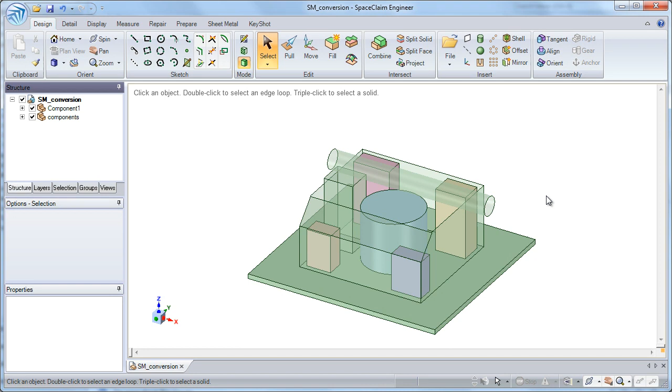Welcome to this sheet metal training module where today we'll look at how to convert a solid body into a sheet metal body. What you're looking at are a number of components on a board surrounded by surfaces. All the surfaces represent keep-out areas where the sheet metal body has to be smaller than those.

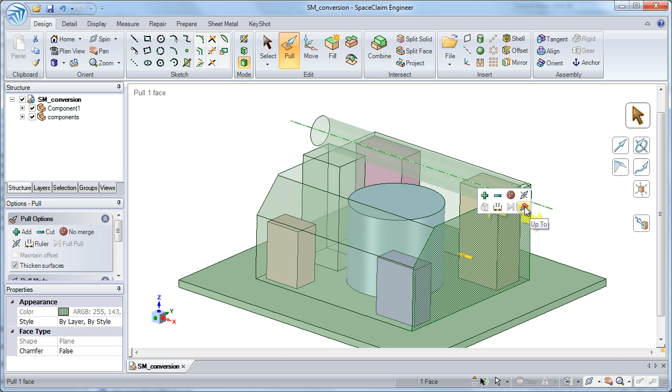So what I'll first do is use one of the surfaces that represents the extents and pull on it to create a solid body, and this will be the basis for my sheet metal structure. Now I want to pull on the top of it to make it a little bit bigger. The only requirement is that it sits below that cylindrical surface.

And I want to get rid of this small surface here, so I could either click Fill right now or pull on it until it's completely gone.

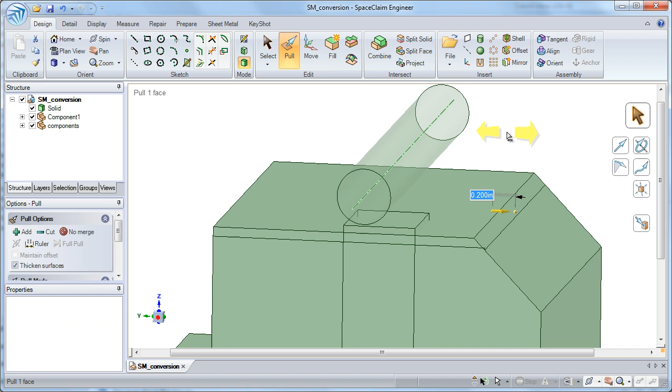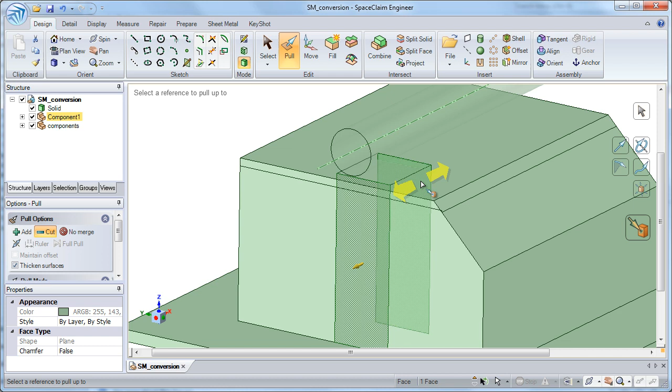Last thing I need to do is make sure I have no material where this rectangular cutout is. So again, using the surface that represents the keep out zone, I can force the pull tool to make a cut and force it to go up to the back surface. Now I can't see that, so I'll query-select by rolling up on the mouse wheel until that surface is present and selectable. Then I click on it and I've removed material away.

Now it's time to turn this body into sheet metal. How that's done is we first need to shell this out into a thin body material. I click the bottom surface and say shell. At this point you can type in any value you want. I'm going to type in 39 thousandths, that's roughly 1 millimeter, and then click the green checkbox.

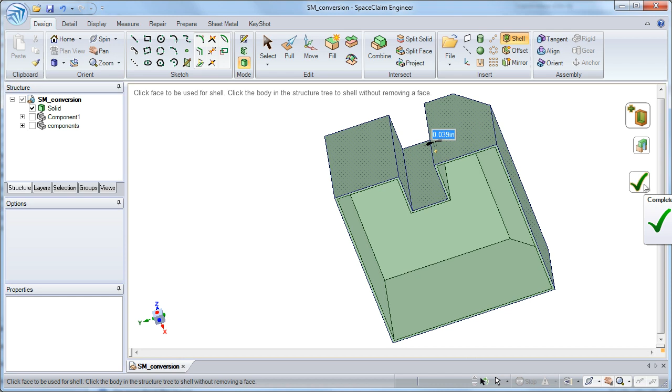And so this is going to be our sheet metal body, and we need to convert it to sheet metal. So I go to the sheet metal tab and say convert, and click on the solid body.

Every candidate for a bend and rip shows up in red. Right now my junction type is set to a bend, so any location I select, any red junction, turns into a bend. And so I could keep clicking all the way through.

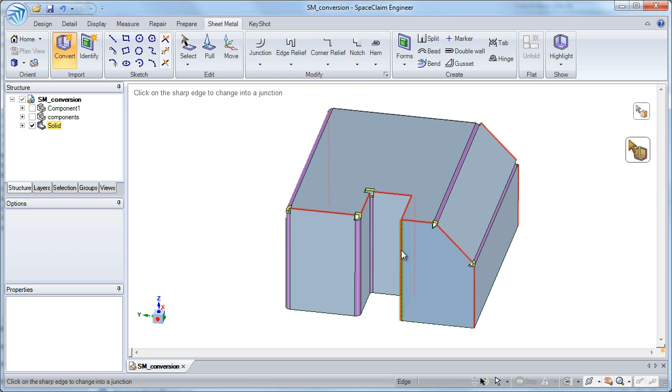And I think maybe I want a couple more bends on here, but I mostly want rips elsewhere. So instead of changing the junction type to no overlap and selecting the rest of these, you can do them all at once.

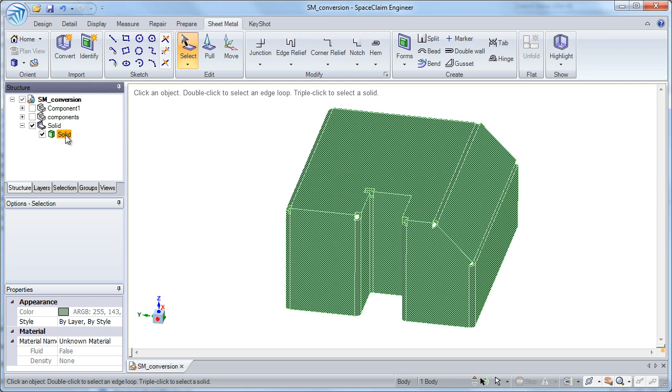Click the select button to get out of that mode. Triple click on the solid, which does the same thing as selecting the solid from the structure tree. With that selected, you want to go to the selection tool, or selection tab, and grab every hard sheet metal edge. And you see down below I've got 10 of those now selected.

With those selected, I could designate the junction to be a no overlap. And now those all turn into ripped corners.

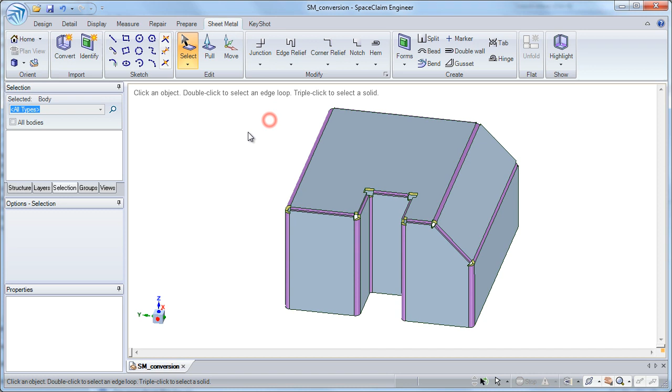So going back to the structure tree, I see that I've got one solid body, so it looks like I've got everything on one body, and when it unfolds, hopefully it unfolds correctly. So to unfold this, I'll select any planar face and click the unfold button. And there's the envelope dimensions of the unfolded body.

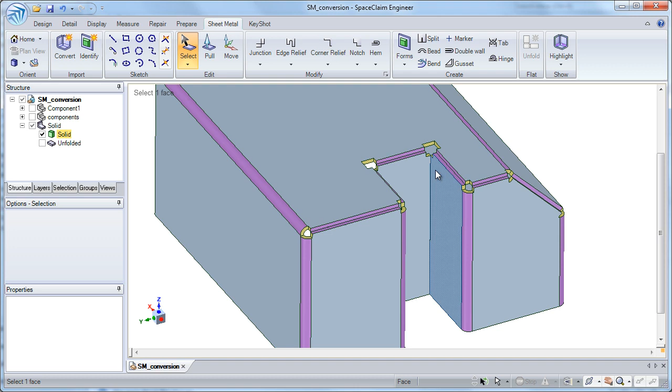Now, if I wanted to try out different unfold scenarios, meaning I could take any of these junctions and convert them from a rip to a bend and vice versa. So in the select tool, I'll go grab a junction, just select it, and turn this into a no overlapped or rip junction. Now when I do that, you see I've got two solid bodies in the structure tree.

This one has no bends associated to it. So I could take maybe that junction, turn that into a bend if I wanted to. Now I'm back to one solid body because it's all joined together.

And let's see what this looks like in the unfolded state. I'll click a planar surface and say unfold. Now you see that I've got in bright red a big overlap between those two flanges.

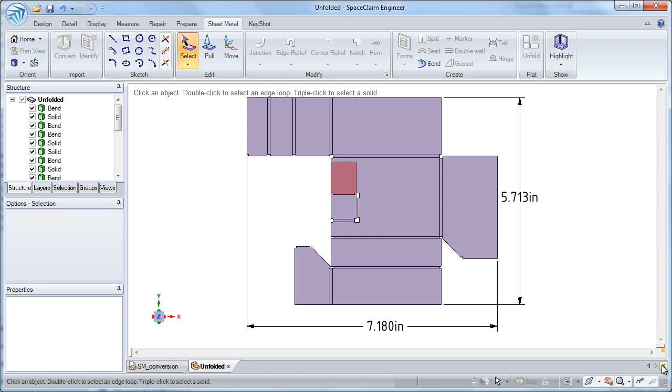So that's not going to work, so I'll just close out the document or that flat pattern and grab maybe this back. I can't see that junction, so I need to use query select and roll up on the mouse a few times until the purple becomes selectable.

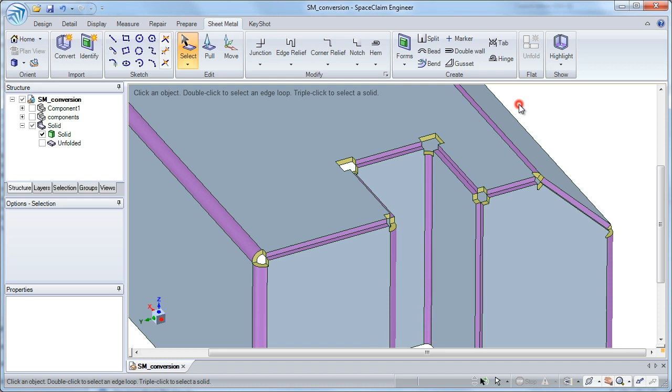Now I can select it and turn the top one back into a ripped junction. Now I should be able to unfold this without any problems. Click any planar face and say unfold. Now you see there's nothing showing up in bright red.

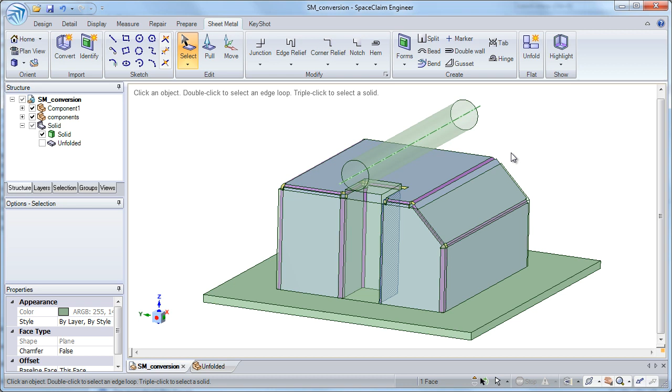So just to recap, I've shown you how you can take an existing design with components and restrictions on it, turn it into a solid body for the purposes of then making a sheet metal enclosure. Thank you very much for watching.